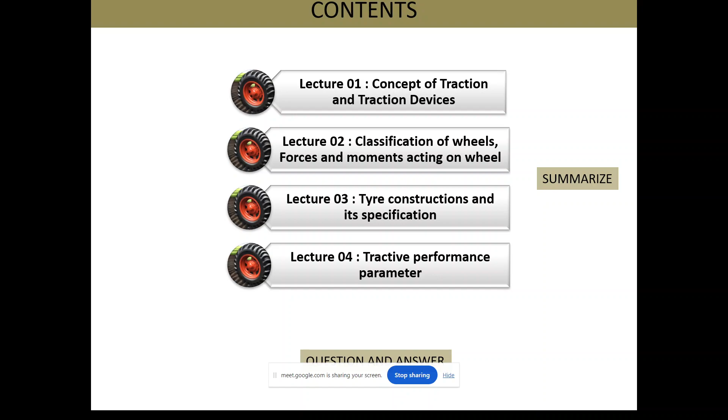So let's start with a basic introduction of this course. Mainly, the main use of a tractor, as you must know, is for pulling implements, sometimes off-road and sometimes on-road for transportation. For pulling, we pull implements like sowing machines, tillage implements, and sometimes for threshing purposes, and so on.

So for pulling those implements we need to generate traction. That is the main purpose of the tractor. And from there we can also get a basic definition of traction, which is nothing but the way a vehicle uses force to move over a surface. That is a basic, layman definition of traction.

As we increase our implement size to increase the field capacity or field efficiency of the machine, with that increased field capacity, we need to have better traction. Suppose we have 45 kilowatt engine power, but we are taking only hardly 23 or 30 kilowatt, then that wasted power needs to be taken into account, and we will discuss why most of the power gets wasted.

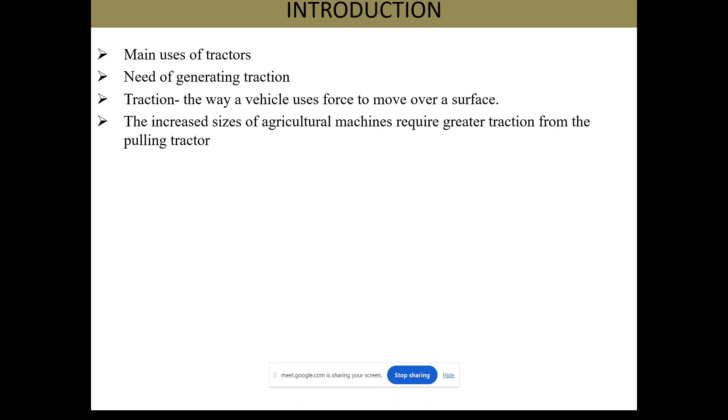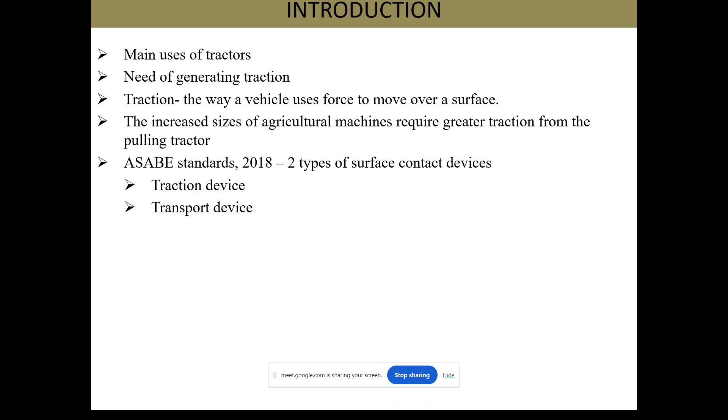This is an ASABE 2015 standard diagram showing how power gets transmitted from the flywheel to the drawbar. If you have any doubt, you can ask anytime, and I will be continuing.

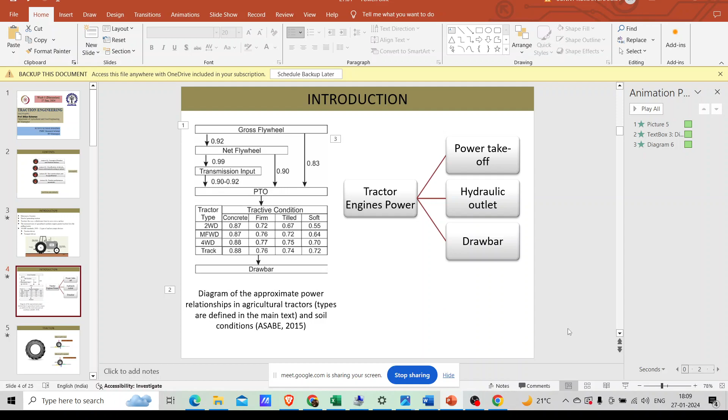Okay, so from gross flywheel to net flywheel, 92% power, 92% efficiency is there. From net flywheel to transmission input and to PTO, all the efficiencies are shown here in this diagram.

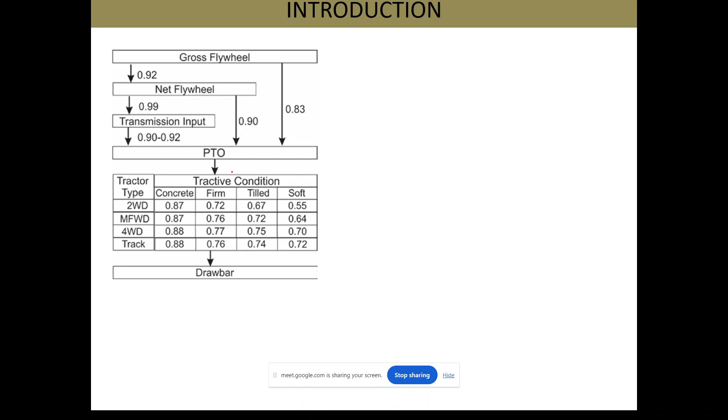The main thing you can see here is that as we move from concrete to soft surface, the efficiency which we get at the drawbar is decreasing.

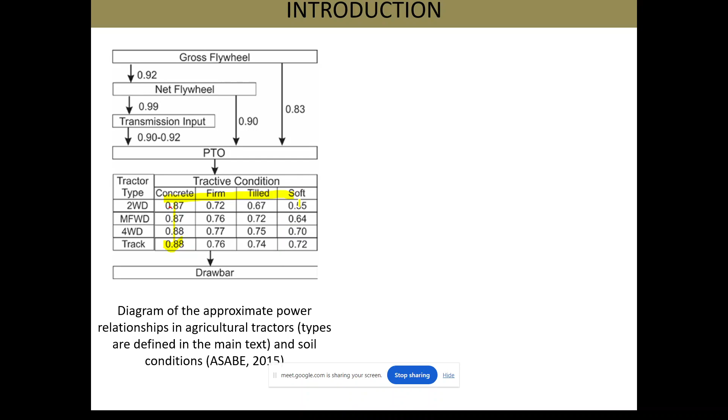As we move from concrete to soft soil, the efficiency is basically decreasing. And as we move from two wheel drive to mechanical front wheel drive to four wheel drive to track, the efficiency is increasing. That is a general observation which you can conclude from this diagram also.

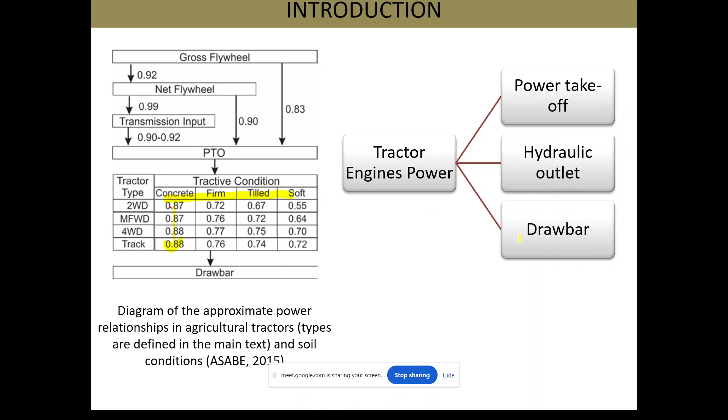From engine power, we basically get three power outlets: first is power takeoff, second is hydraulic outlet, and third is drawbar. One thing to note is that drawbar is the most used power outlet, and it is also the least efficient. In this lecture series, our focus is the power which we take from drawbar only.

So let us start with what traction actually is. I don't have currently that pad, I will be having it next week. So if the diagram gets disturbed, please manage it.

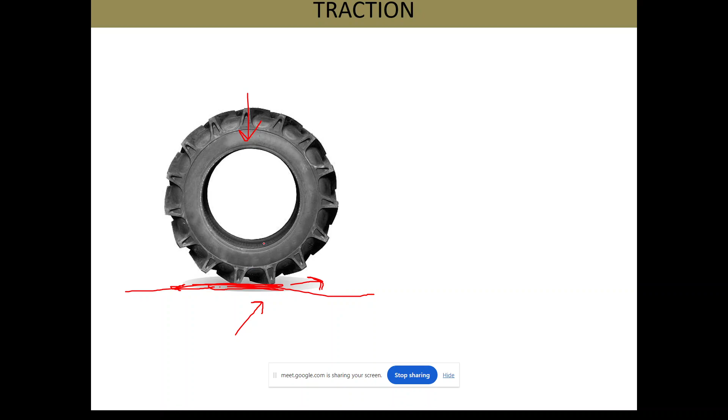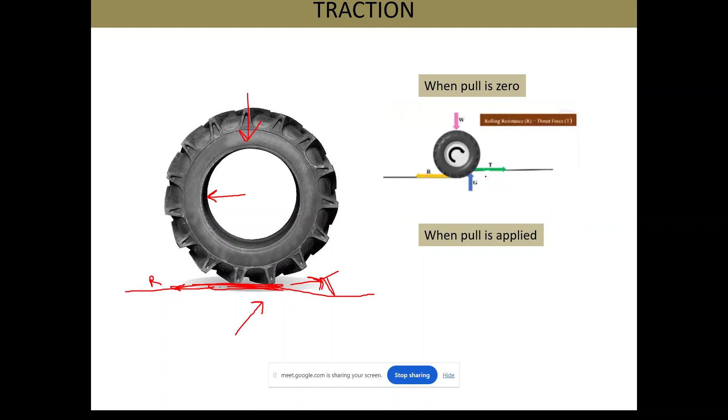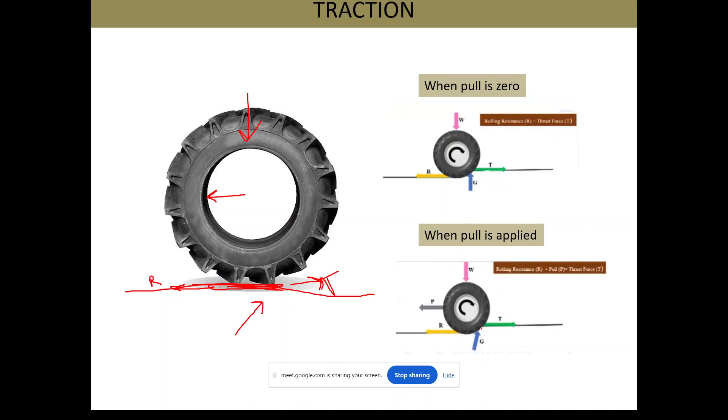This rolling resistance developed, and the thrust which we get from the shearing action, when we subtract rolling resistance from that thrust, we get the pull generated by the tire. When pull is zero, we have no pull, and the thrust is there, rolling resistance is there, and the ground reaction is acting vertically upward. When pull is applied, the ground reaction is shifted, it is tilted, and we have a pull generated here.

The next part is factors affecting traction. First is soil parameter, in which moisture content, bulk density, or type of soil comes. Second is wheel parameter, in which inflation pressure or the weight coming on the tire is considered. Third is operating parameters, in which soil-tire interaction parameters like slip mainly comes.

The total thrust generated by the tire is given by the equation A*C plus W*tan(phi), where A is the contact area of the tire which is in contact with the soil, C is the cohesion, W is the normal load, and phi is the angle of internal friction.

When we have sandy soil, C equals 0, and when we have clay soil, phi equals 0. The importance of this is that when C equals 0, that term is 0, and we get all thrust from W only, as phi is mainly generally constant.

So in sandy soil, we have to increase weight to get more traction. And when phi equals 0, that term becomes 0, and C is generally a constant parameter, so we have to increase the area of the tire to get better traction.

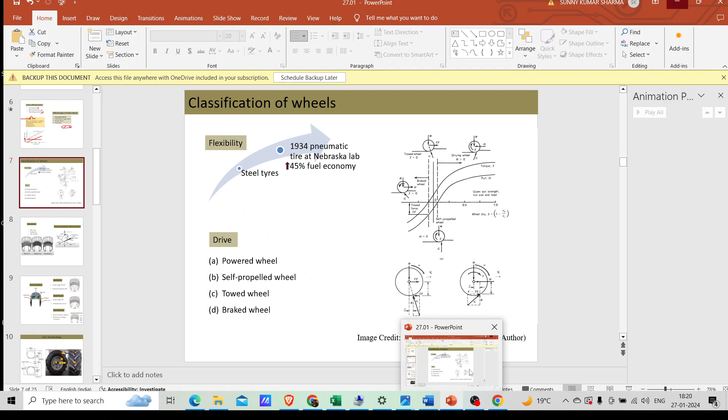Classification of wheel is the next topic. So wheels can be classified...

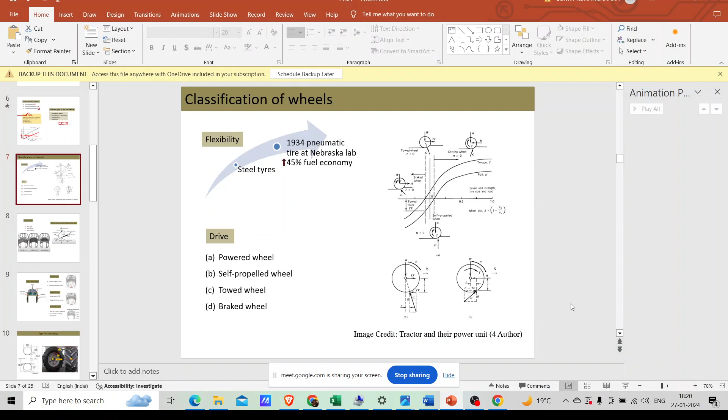So wheels are mainly classified based on flexibility, based on drive condition, and also based on construction. Based on flexibility, wheels can be classified as steel wheel and pneumatic wheel.

Earlier, we were having steel tires only, but steel tires had many limitations. They were very bulky, dumpy, and gave a lot of sound when in working condition. For that, in the 1930s at Nebraska lab, research was done, and when pneumatic tires were invented, the fuel economy increased by 45%, and it just revolutionized the whole agriculture system.

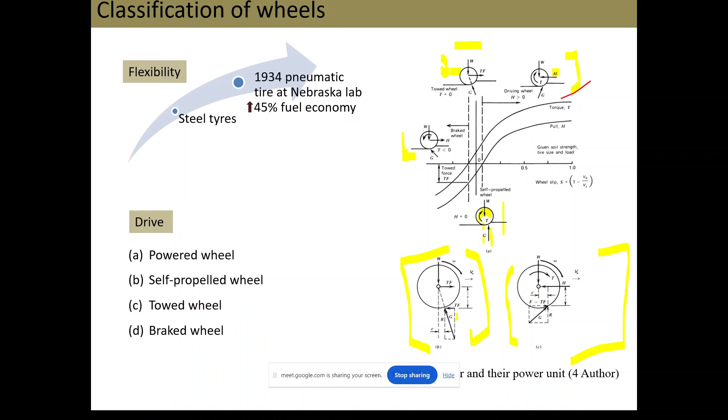In detail, you can take the screenshot of this powered wheel and brake wheel. In diagram B, we have towed wheel, and in diagram C we have powered wheel. This diagram in detail we will cover in the next lecture series.

Is anyone else trying to enter?

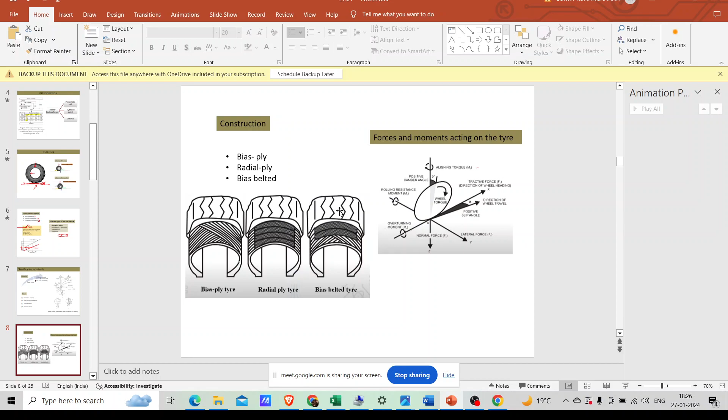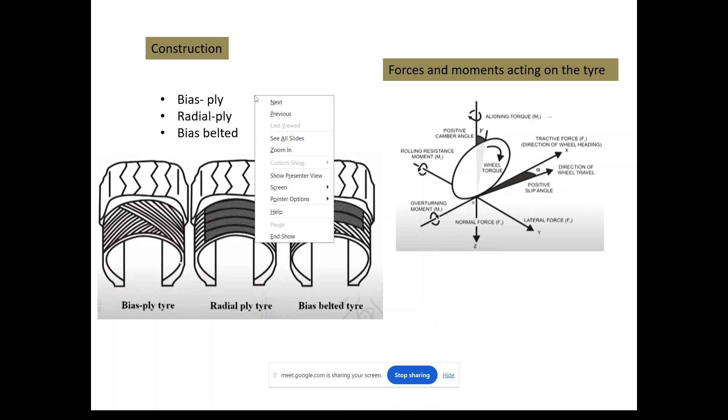Based on construction, tires can be classified as bias ply tire, radial ply tire, and bias belted tire. Bias ply tire is shown here in this diagram. Radial ply and bias belted ply are also shown, and in detail we will cover in the next slide.

Forces and moments acting on the tire are generally three forces and three moments. In the x direction, we have tractive force, and the moment acting in this direction is the overturning moment. In the y direction, we have lateral force, and the moment acting is the rolling resistance moment. In the z direction, we have normal force, and the moment acting is the aligning torque.

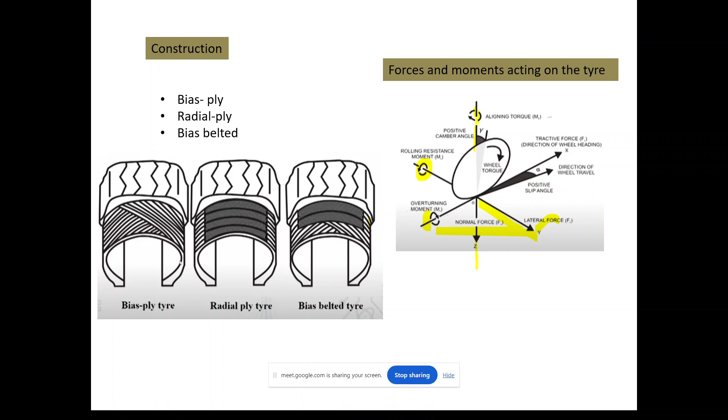Coming to tire construction, generally in a tire we have tread, edge cover, sidewall, inner liner, carcass, and steel belts, as shown in the diagram.

In bias ply tire, we have beads and carcass. Suppose we have the center line of the tire; with the center line, these plies make some angle, called the crown angle. For bias ply tire, this is 54 degrees, and these plies are at 90 degrees in the radial ply tire.

The difference between these is a geometrical difference. Mainly in bias ply tire, sidewalls are relatively stiffer, while in radial ply tire, sidewalls are prone to cut because the radial ply tire gets more deflection. This also gives better traction in field conditions.

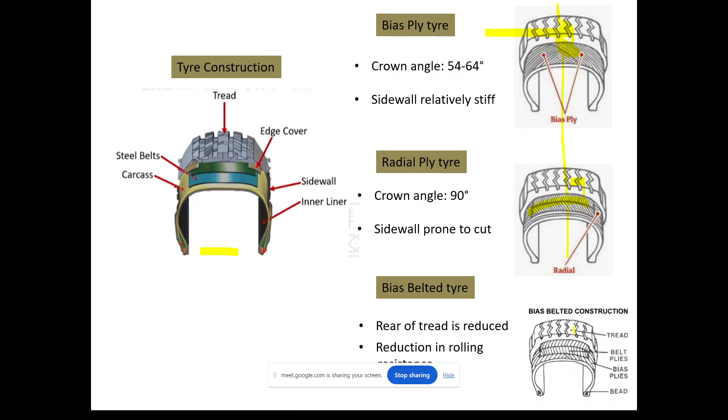Bias belted tires are nothing but a combination of bias tire and belted tire. A belt is just there; when we insert a belt in this bias ply tire, we get a bias belted tire.

Tire terminology consists of the main dimensional parts of the tire. From this real diagram of the tire, you can relate to this schematic diagram, where the section height is shown here, over the nominal rim diameter and rim diameter, and this difference, flange height, is also shown here as h dash.

This is undeflected when unloaded; this is the unloaded condition, and when we have deflection, the section height is called deflected section height. From the center line, when we divide the overall diameter, we get the radius of the tire, and when we subtract that deflection from the radius, we get the static loaded radius.

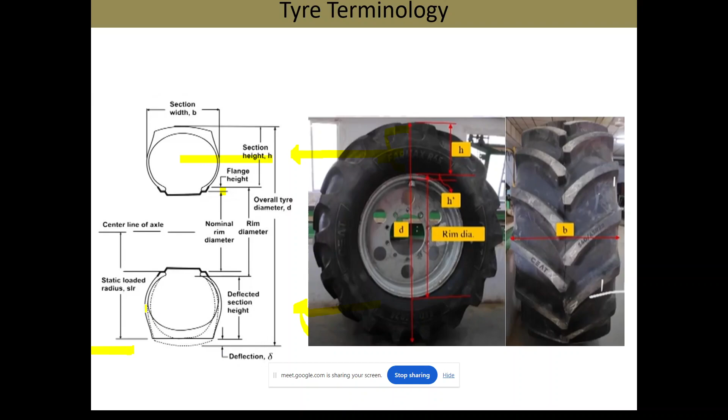This is the tire designation. The tire is mainly designated by its size, aspect ratio, type of construction, ply rating, pattern code, load plate, rim diameter, serial number, manufacturer's name, collaborator's name, and company logo.

This is a car tire, in which the designations are a bit different. The tire for tractor tire I will show in the next slide. For a car, generally we have P for passenger car, 215 is the nominal width, 65 is the aspect ratio, R is radial, and so on.

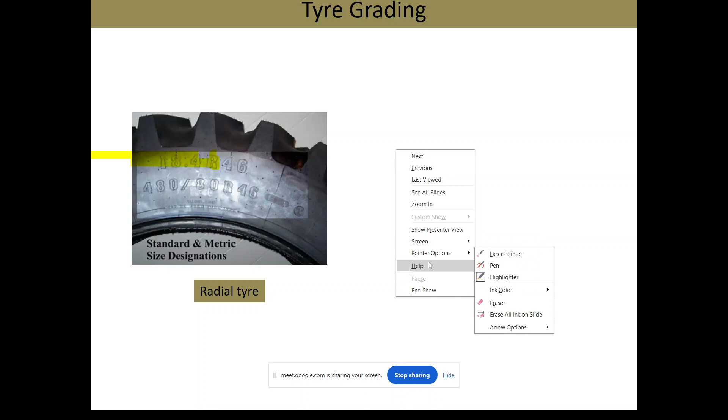Tire grading for radial tire. First is the radial tire, which is designated with an R symbol. When we have this R symbol in the tire, we can easily say that this tire is radial. 18.4 is the section width. Suppose here the tire is designated as 18.4 R46. So first, 18.4.

Hello, Sivaraman. Hello. Hello, Sivaraman, are you there? No, sir. Yes, sir, are you there? Sir, I'm present, sir.

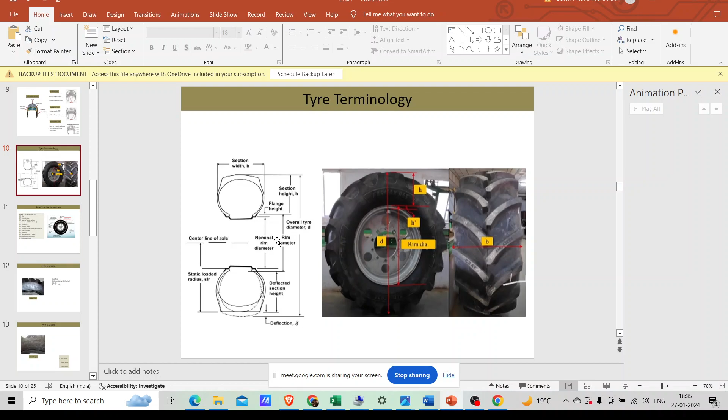From this section width you will get section height from this aspect ratio, and that section height you multiply by 2, as you have two section heights for calculating overall diameter. And this rim diameter you will multiply by 1.06, because you have some flange height there. For compensating this nominal rim diameter and rim diameter, we multiply by 1.06 because nominal rim diameter is designated on the tire, and rim diameter is somewhat bigger. For compensating that we multiply with 1.06, so you can do that, then you will get the radial tire.

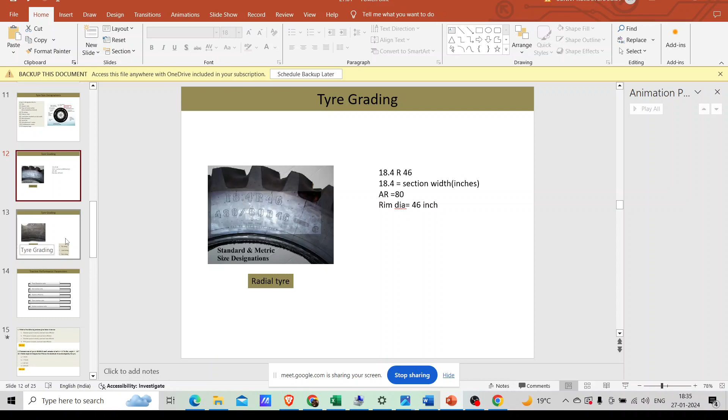That problem is also given in the next question answer session, so if you are calculating then it's okay. And for bias ply tire, only R - if R is not designated on the tire, you can say that this is a bias ply tire.

13.6 is what? Can you tell? Can you say what is 13.6? 13.6 is the section width, sir. Section width, yes. And aspect ratio is not given here, so aspect ratio... we should take 75%.

Aspect ratio as 75. Yes. And 28 is the nominal rim diameter. Yes, 28 will be the nominal rim diameter. And below that we have 12 PR nylon 128 A6.

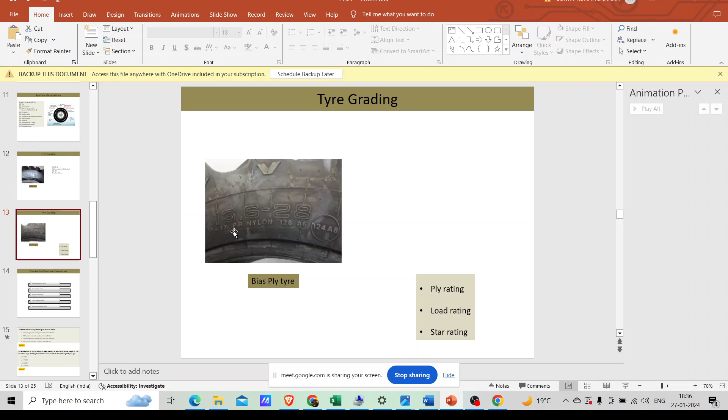12 PR is for ply rating. Ply rating and load rating are nothing but designations of the strength of the tire, mainly the load carrying capacity. And the star rating is how much inflation pressure the tire can bear.

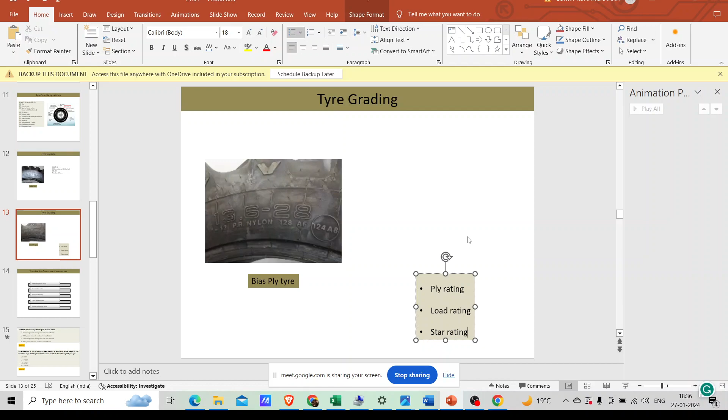With every increase in the star rating, suppose we have 1 star and we increase the star by 1, we are saying that the inflation pressure it can bear is 6 psi more. Meaning 1 star is equal to 6 psi.

Tractive performance parameters are the gist of this whole traction series. So do you have any idea what is travel reduction ratio? Travel reduction ratio is also known as coefficient of slipping, sir. Travel reduction ratio is nothing but slip only. Yes sir. What is slip? Can you say?

Without load, a tire can travel and cover a specific distance, but with load, the tire cannot be able to cover that distance which it previously covered without load, sir.

So the difference between these two is referred to as travel reduction ratio. You said about loaded and unloaded condition, right? Yes, sir. I think you said this slip definition in terms of loading and unloading, right? Yes, sir, okay.

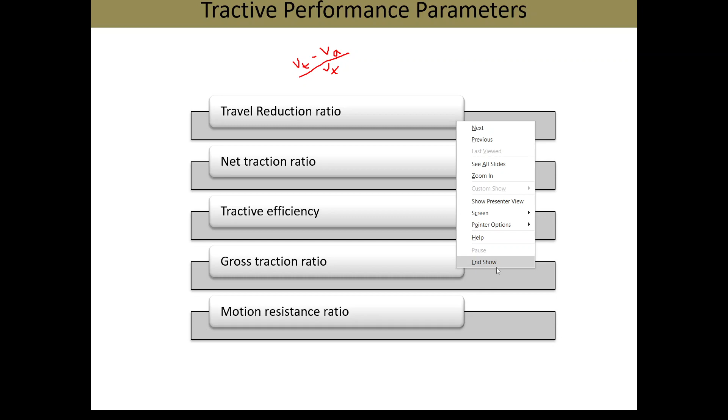Is anyone trying to enter? Hello, Sundargiri.

Sundargiri, can you tell what is net traction ratio? Actually, I don't remember.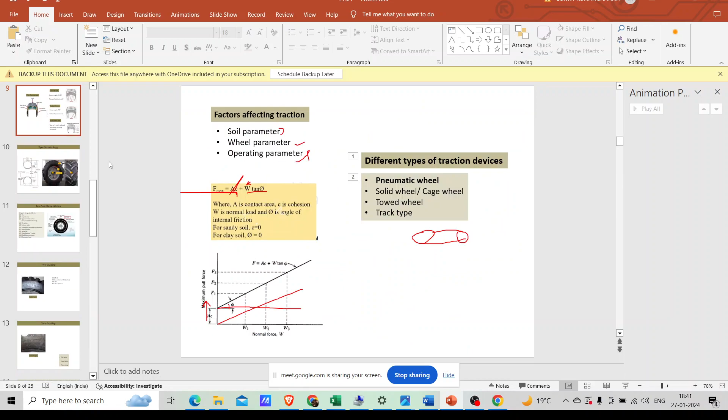Net traction ratio is actually the pull, the total pull, which we discussed earlier in this slide. I was telling that this is the thrust which the tire generates, and this is the rolling resistance. This thrust minus the rolling resistance, when pull is applied, we get some pull, which is nothing but thrust minus rolling resistance. This pull is divided by the dynamic weight coming on a wheel, and that is the net traction ratio. This pull by W is net traction ratio.

This rolling resistance by W is the motion resistance ratio. This thrust, the total thrust developed by the tire, divided by the dynamic weight coming on it, is the gross traction ratio. This pull by W is net traction, this T by W is gross traction ratio, and this rolling resistance by W is motion resistance ratio. Can you repeat what I said?

Sundargiri? Yes, sir. So P by W is what? Sir, your dynamic load with the rolling resistance divided by rolling resistance is the net traction ratio. No, no, no. Rolling resistance divided by dynamic weight is motion resistance ratio, not net traction ratio.

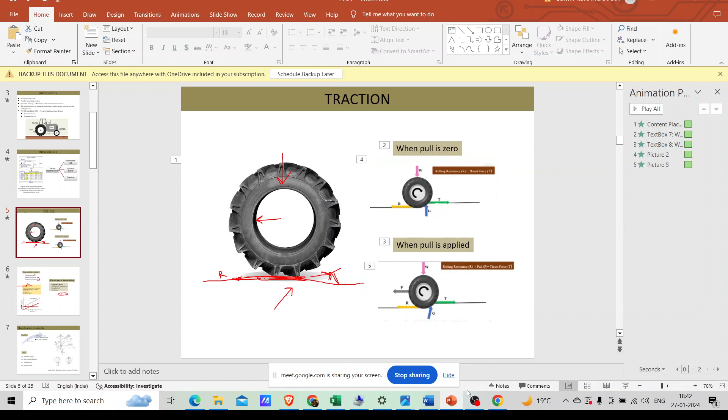Net traction ratio is pull by W. Net pull divided by dynamic weight is net traction ratio. Rolling resistance divided by weight is motion resistance ratio. And thrust divided by weight is the gross traction ratio, the total thrust generated by the tire. Okay, is it clear? Yes, sir.

So travel reduction ratio, or slip, is the reduced velocity due to loading condition, due to the shearing action between the tire and soil. Its expression is 1 minus V actual by V theoretical, or V theoretical minus V actual by V theoretical. Net traction ratio I have defined. Tractive efficiency is nothing but the drawbar power by the axle power, the power which the axle gets from the engine.

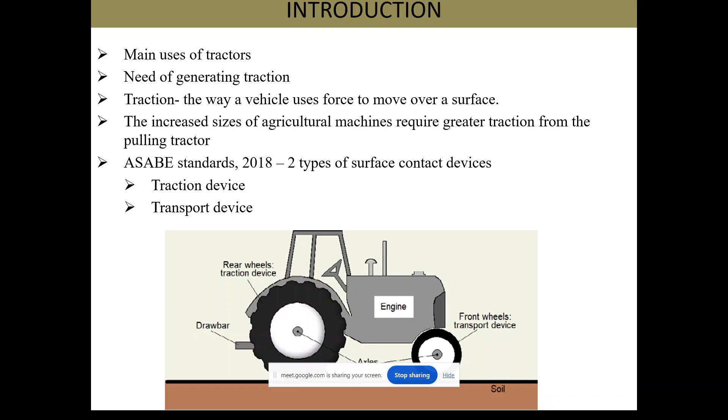Suppose this gray part is the axle. This axle is getting some power from the engine, and this tire is developing some traction, some drawbar power. This drawbar power divided by the axle power which the tire is getting on its axle is the tractive efficiency. So the tractive performance of any tire can be set on the basis of five parameters: the slip between the tire and the soil, the net traction ratio, gross traction ratio, the motion resistance ratio, and the tractive efficiency, which is nothing but the drawbar power by axle power.

Sundargiri, tell me what are those five parameters on which we can define the tractive performance parameters.

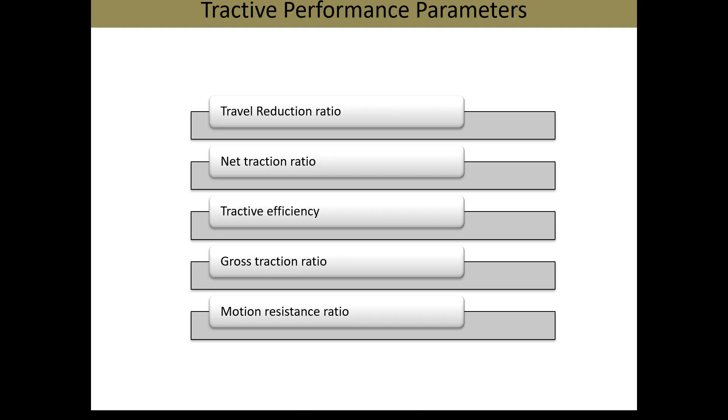It is 7.3 kilonewton, sir. Yes, correct. The third question is, which of the following combinations will give maximum deflection of the tire?

Which of the following combinations will give maximum deflection to the tire? If normal load is maximum and inflation pressure is maximum, if normal load is minimum and inflation pressure is maximum, if normal load is maximum and inflation pressure is minimum, if normal load is minimum and inflation pressure is minimum. What do you think?

What is the answer? Normal load is maximum and inflation pressure is minimum, sir. I think so, sir. Correct, correct. Normal load is maximum, it will obviously give more deflection. And inflation pressure is minimum, giving more deflection.

Yes, sir. So the fourth question is, which we were doing that time also. What overall diameter did you get for the 13.6 28 tire? Aspect ratio you take as 0.75. 13.6 is the section width in inches, 28 is the nominal diameter in inches.

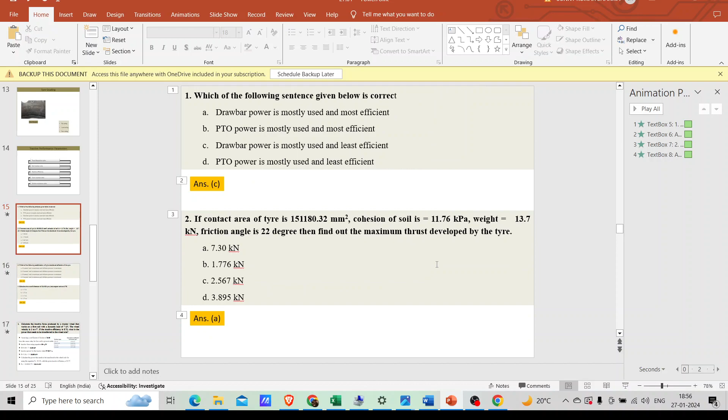It is clear now? Yes, sir. Actually, I don't have a pad right now, and I don't have a scribble pad also. I'm not able to get it.

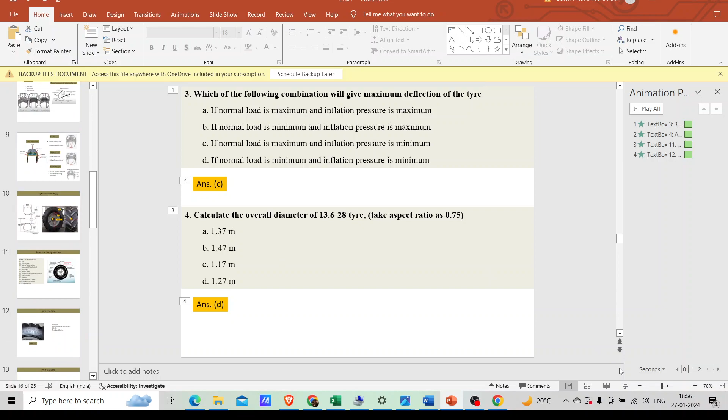So the next five more questions will clear all your concepts of this course, of the first week. So I'm giving you those questions. The first subjective question is: you have to calculate the tractive force produced by the tractor wheel.

Calculate the tractive force produced by a tractor wheel that works on a firm soil with a dynamic load of 7 kN. Then the wheel velocity is 3 meter per second. If tractive efficiency is 0.75, what is the power that needs to be transferred to the wheel axle?

So there are basically two questions here. You have to first calculate the tractive force which the wheel needs to generate for a 7 kilonewton load - the dynamic load coming on tractor is 7 kilonewton. You have to find the tractive force. Then, if it has velocity of 3 meter per second and tractive efficiency 0.75, what power needs to be given to the wheel axle - that you have to calculate. So first calculate the tractive force produced by the tractor.

Weight coming on it is 7 kilonewton. So first, what will you do? Just tell me the steps. W, dynamic load is W, W is coming on it.

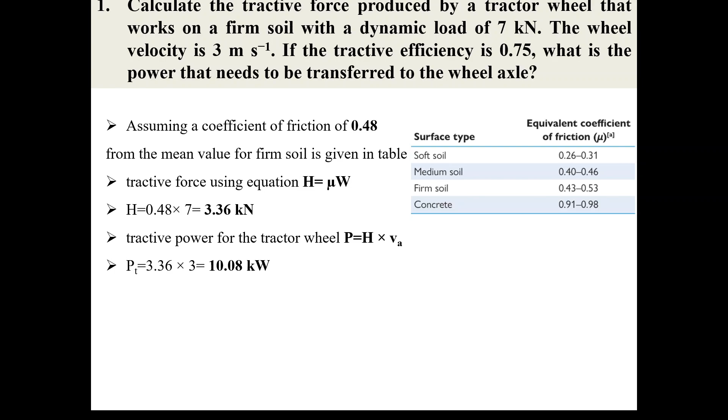Then what is the power that needs to be transferred to the wheel axle? What will you do now? What is tractive efficiency? I've described it in earlier slides. Tractive efficiency is the drawbar power which we have calculated, divided by axle power, which the question is asking - the power needs to be transferred to the wheel axle. Tractive efficiency is drawbar power by the power needed to be transferred to the wheel axle, which is 0.75. When you do that, you will get the power needs to be transferred to the axle.

Okay sir, did you get this problem? Yes sir. So for 13.44 kilowatt at axle, we will design the transmission system accordingly. In transmission, we have some efficiencies, some losses. This 13.44 kilowatt must be transferred to the wheel axle.

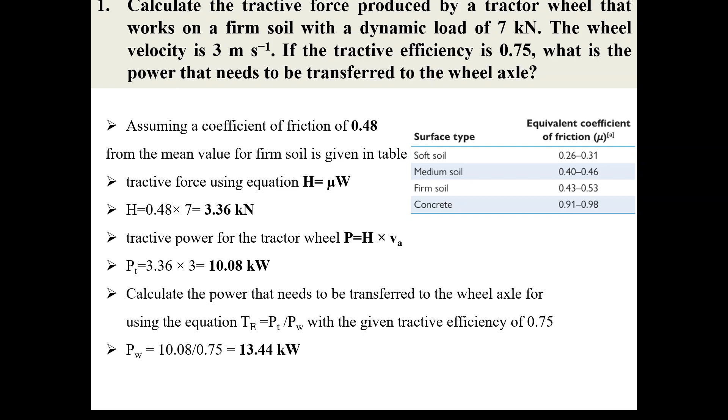Second question is, a wheel on a tractor receives 45 kilowatt from the tractor powertrain. The wheel rotates at 30 rpm. If the rolling radius of the wheel is 0.75 meter and the speed of the tractor is 2 meter per second, calculate the torque acting on the wheel and travel reduction ratio. Travel reduction ratio is also known as slip, commonly known as slip.

What is the formula of power coming on the axle? Do you know the formula of power? This 45 kilowatt is coming on the...

Sir, the wheel is getting 45 kilowatt. This is the power coming on the wheel from the powertrain. So the formula of power is 2 pi n t. 2 pi n is nothing but related to power, formula of power is torque into omega. Omega is nothing but 2 pi n. N is given here as 30 rpm. So you can get omega, the angular velocity.

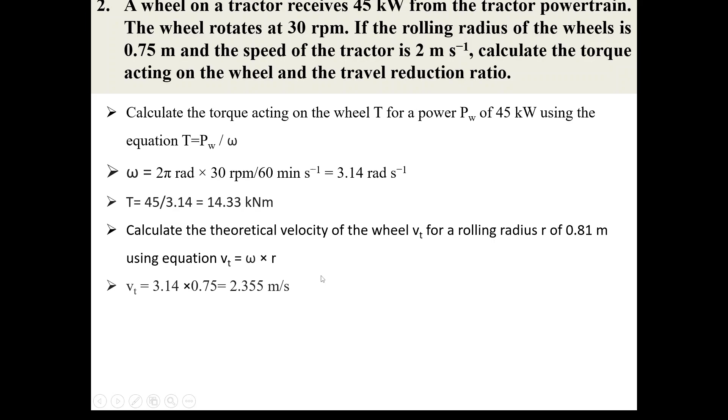Yes, sir, theoretical velocity you got as 2 pi r omega, or 2 pi n into r. 2 pi n is omega, which we have already calculated, into rolling radius 0.75. Omega into r is the theoretical velocity. 3.14 into 0.75 gives the theoretical velocity. And the actual velocity is given as 2 meter per second. So 2.355 is theoretical velocity and actual velocity is 2 meter per second.

With this slip equation of theoretical velocity minus actual velocity by theoretical velocity, you can calculate the slip. 2.355 minus 2, by 2.355. What ratio do you get? Slip comes out to 15.5%. Are you doing it?

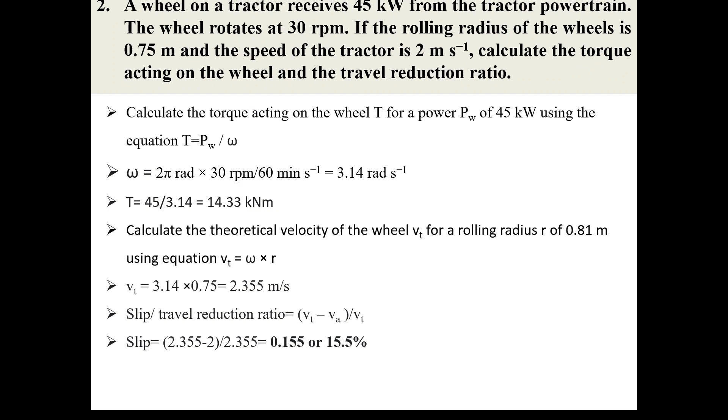Okay, come to next question. Find the distance covered by a tire whose designation is 500 by 65 R22.5. If it makes 12 revolutions in 2 minutes on a hard horizontal surface with a tire deflection of 25%. If wheel slip is 15%, then find the actual distance covered.

So first you have to calculate the overall radius of the tire. For bias ply tire, we have done this earlier. For radial ply, 500 is what? Section width in mm, 65 is the aspect ratio, and...

22.5 is the nominal rim diameter in inches. You do every calculation in centimeter and tell me what is the overall diameter of the tire. 500 is section width in mm. Calculate the overall radius of this tire.

Can you calculate it? Doing, sir, trying to do. What are you doing, tell me.

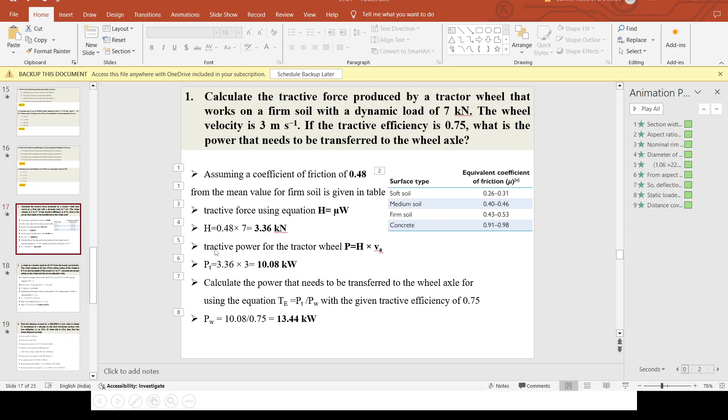So the diameter of the wheel without deflection is what? 1.065, or 1.06 into 22.5, into 2.54. Are you doing this? Doing, sir, yes sir.

Can you cross check that this diameter which I have calculated is correct? 1.06 into 22.5 into 2.54, then 0.65 into 500 in mm, that is 50 centimeter into 2. Is it coming to 125.58 centimeter? Doing, sir.

From the aspect ratio, height we got 0.65 into 50. Yes sir, it is coming. Diameter of the wheel without deflection, correct 125.58, this expression? Sir, it is correct, sir. 125 point, yes sir, correct only sir.

And section height, this part, this is section height. Deflection is del by h. So from here you can calculate deflection. We have h here, we have calculated, this 32.5. Yes sir, this 32.5, you multiply it with 0.25, you will get the deflection.

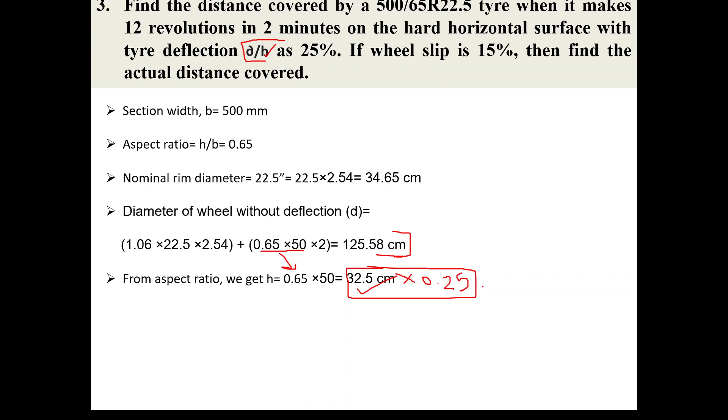This is the deflection that I am getting. And this is the overall diameter. When what deflection you are getting? Is 8.1. 8.1, okay, and this is the overall diameter.

So what is the overall radius? When you divide it by 2, you will get overall radius. What is the radius coming? 62, 62.79. 62.79. 79, sir. 62.7.

So you have got overall radius, and you have got some deflection. Suppose this was the deflection. So when you subtract the overall radius with this deflection, means this minus this, you will get the static loaded radius. The static loaded radius is the overall radius minus some deflection.

So deflection you got 8.125, and static loaded radius is overall radius minus deflection. Yes, it is 54.6. 54.668. This is the static loaded radius.

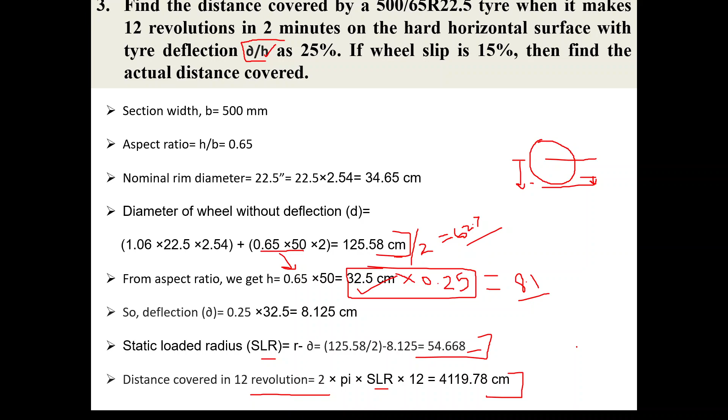We have 15% slip also. For slip, what sir, we will do? Slip is distance by revolution without load and distance by revolution with load. Then distance by revolution without load, so distance by revolution without load we have.

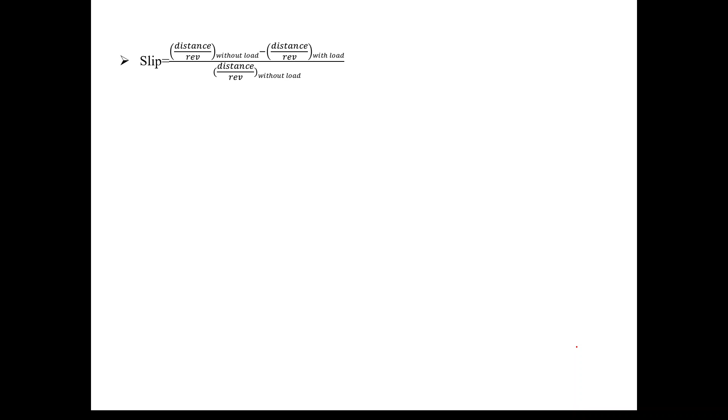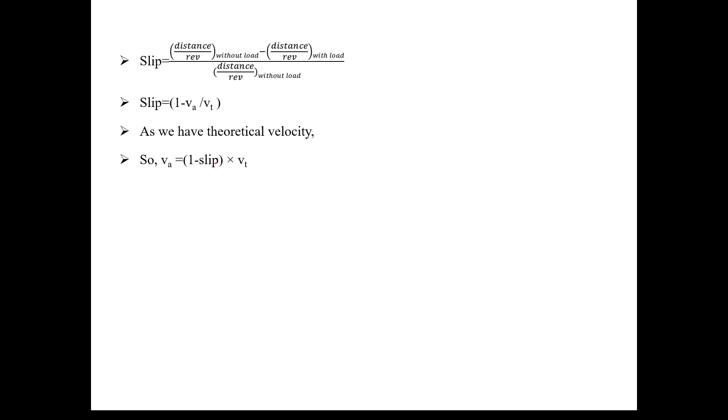Our slip is 1 minus v actual by v theoretical, we also know. So we have theoretical velocity we have calculated earlier. So we have to calculate actual distance. In formula we have actual velocity as 1 minus slip into theoretical velocity.

So this velocity is what? Distance covered by revolution, this is nothing but velocity. Distance by revolution is velocity. And we have to calculate distance, so we will multiply the velocity into revolution.

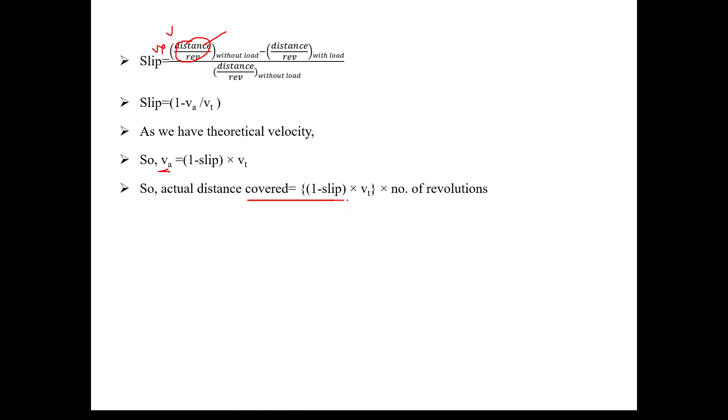This is the actual velocity. We multiply it with number of revolution, we will get the distance covered. Did you get what I said?

Yes sir, yes sir, this is actual velocity. Same thing here, this is actual, theoretical velocity, and actual velocity is nothing but distance covered by revolution. So actual velocity into revolution is the actual distance covered. So 1 minus slip, we have 25% slip, 0.25.

1 minus slip we have, and theoretical velocity is the distance covered by revolution. Distance covered without load, at static loaded radius, that is what we calculated earlier. This is the distance covered without slip, divided by 12 is the theoretical velocity, and this whole term is the actual velocity. When we multiply it with number of revolution, we will get the actual distance covered. So what you got, the actual distance covered?

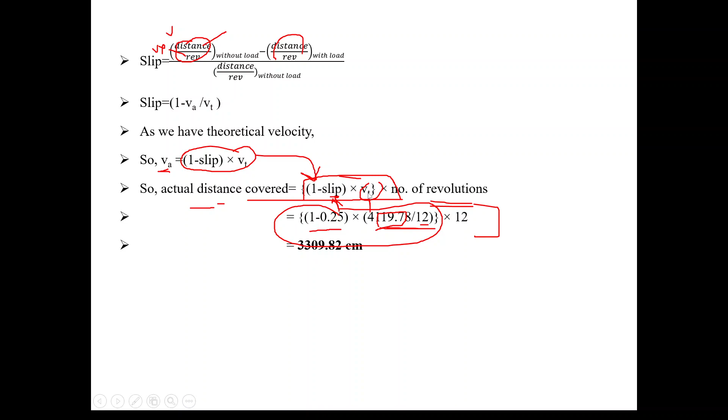I think only you are solving. Currently working it out, sir. Yes Sivaram, yes, currently working it out, sir.

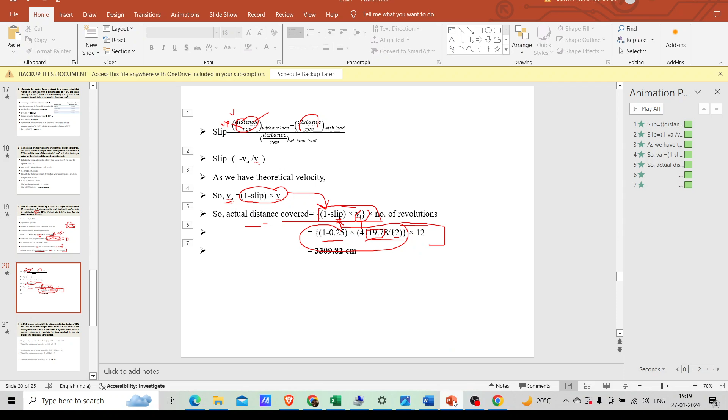Okay, we are moving to the next question. These questions are covering all the concepts which we have studied till now. This question is very easy if you have understood the basic concepts of towing and powered wheel.

A two-wheel drive tractor is weighing 2500 kg with a weight distribution of 30% and 70% on front and rear axle. Means of 2500 kg, 30% is going on front axle and 70% is coming on rear axle. If rolling resistance of each of the wheel is 4%, means 4% is the rolling resistance of every wheel, you have to calculate the force required to tow the tractor. Means just move the tractor, what is the force required, you have to calculate.

Have you understood the question? What you need to do? How will you proceed with this question?

2500 kg, you have to distribute it 30% and 70% on front and rear axle. So first do 30% of 2500. That amount is coming on the front axle. When you divide it by 2, you get the weight coming on each of the front wheels. Then you multiply it with 4%, and you get the force required for the rolling resistance of that wheel. That is only the force required to tow the vehicle, which we discussed earlier, the towing force.

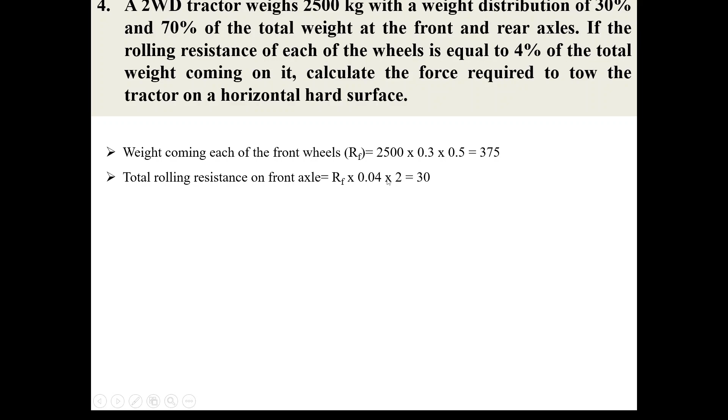So rolling resistance of the front axle will be what? 4% of this value, then multiply by 2, since we divided it by 2 earlier, here I'm multiplying it by 2. This is the total rolling resistance of the front axle. Similarly, we have the total rolling resistance of the rear axle.

This is nothing but the force required to tow - this 30 kg and this 70 kg. When you add them, you get 100 kg as the force required to move that vehicle. This 2500 kg vehicle, if you apply a weight of 100 kg, the tractor will start moving. This is the basic concept of towing. Did you get this?

Yes, sir. Yes, sir. Okay.

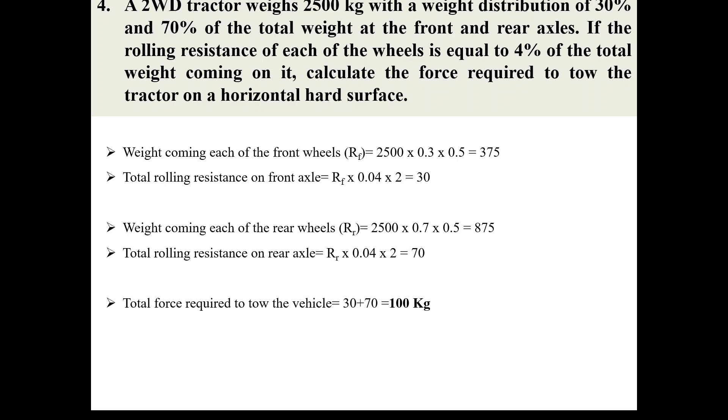The next question is, if this same tractor, whose weight is 2500 kg, is used to pull an implement of 3 bottom MB plough weighing 250 kg, the weight transfer is 2% from the front axle when an implement is attached to a tractor - some weight transfer comes from the front axle and from the implement also. So from the front axle it gets 2% of the weight transfer, and from the implement it gets 10% of the weight transfer.

You have to calculate the coefficient of rolling resistance - the concept we discussed in earlier slides. Calculate the coefficient of rolling resistance of each rear wheel if the weight distribution is equal among the two wheels. So how will you proceed with this question?

You make a tractor. This is the ground reaction on the front wheel. This is the ground reaction of the rear wheel. Weight is getting transferred from the front wheel, and some weight it is getting from the implement. Suppose this is the implement - it is transferring a weight of 10%, and from the front axle there is a weight transfer of 2%.

So what is the dynamic weight? It has its own weight - the tractor is weighing 2500 kg. It has its own weight. 2% of its weight is coming from the front axle, and 10% is coming from the implement. So what is the dynamic weight coming on the rear axle? Can you calculate? You have to add its own weight with the 2% from the front axle and 10% from the implement. Can you add?

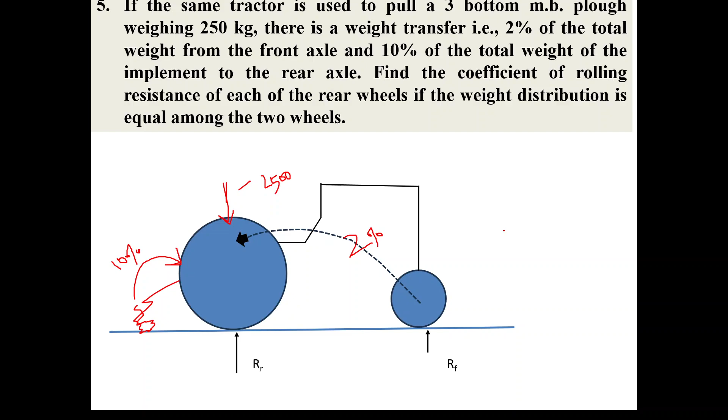2500 kg, 30% was the weight on the front axle, and of that 30%, 2% is coming on the rear axle. So weight transfer from the front axle is 2500 into 30% into 2%, which is 17.5 kg. Weight transfer from the implement is 10% of 250, that is 25 kg.

So what is the total weight? Total weight at that moment means weight transfer from the front, from the implement, and its own weight also. Its own weight is 2500 kg and 70% of that 2500 kg. You add this with the front weight transfer and implement weight transfer. When you add these three values, you get 1792.5 kg. This is the dynamic weight.

Now you have to calculate the coefficient of rolling resistance. For that, you need to calculate the rolling resistance first. Rolling resistance is nothing but what?

4%, I think it is given. Rolling resistance was given 4% in earlier question. So this is the total weight, and 4% of its this value is the rolling resistance of that wheel.

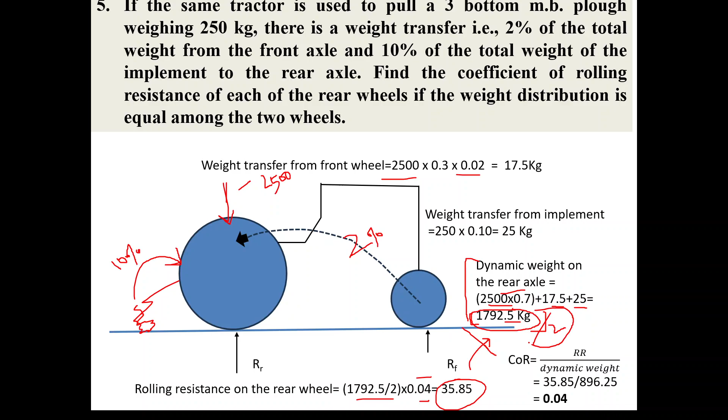Divide and tell me what you are getting. What you got? 35.85 by 1792.5 kg by 2, what you got? It is coming 4%. Coefficient of rolling resistance is 4%.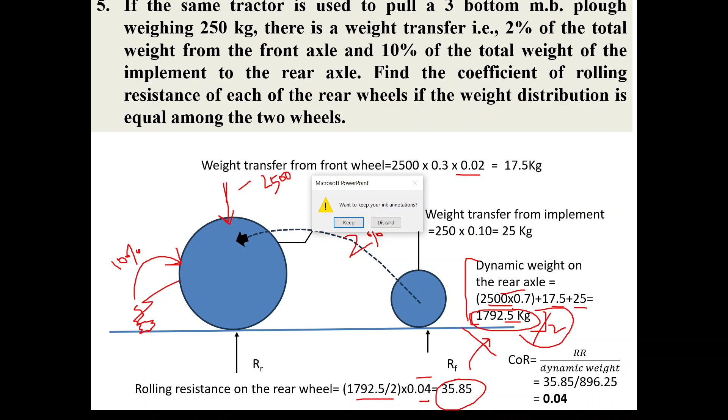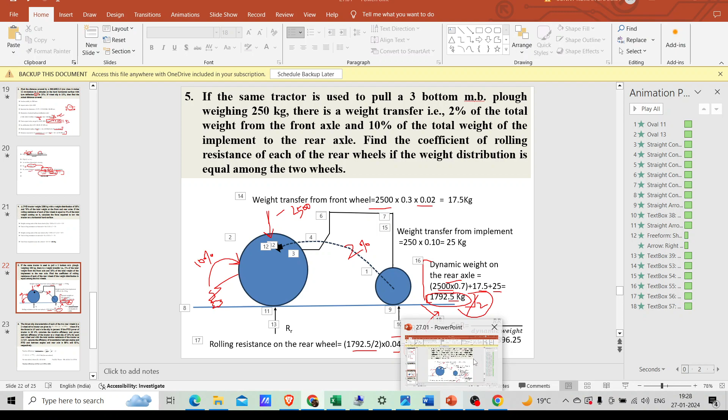Sivaraman and Sundarkiri. Sir. So we have discussed 9 questions till now. We will discuss the last question and then we will end our session now. You do this last question. This question is bit lengthy, but it has all the concepts which we have discussed till now.

The thrust-slip characteristics of each of the two rear wheels in a two-wheel drive tractor are given by this equation, the equation for thrust developed by one of the rear wheels. The concept of thrust developed by a wheel we have discussed in the first 3-4 slides. So the thrust the wheel is generating is given by this equation: 34 into 1 minus e to the power minus 0.06 s, where S is the slip. So F is thrust developed by the rear wheel in kilonewton, S is the slip in percentage.

If the PTO power of the tractor is 30 kilowatt, calculate the tractive efficiency and power delivery efficiency. Tractive efficiency is the drawbar power by axle power. You have to calculate the tractive efficiency, so for that you will have to calculate the drawbar power, and axle power is given. I think power delivery efficiency of the tractor at the wheel slip of 15%.

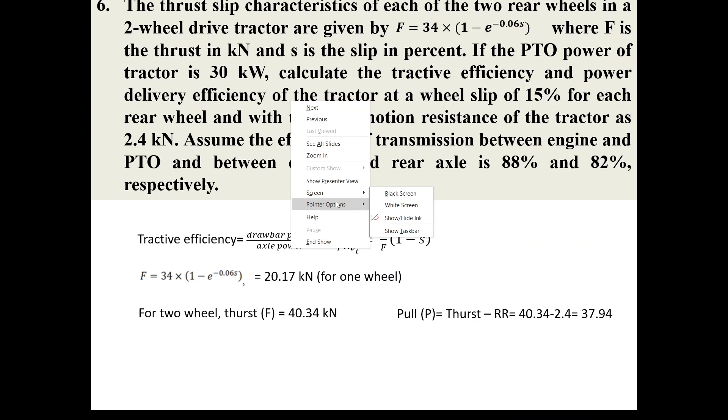Power delivery efficiency. And tractive efficiency is what? You know it is written here also, drawbar power by axle power. But when we need to calculate the power delivery efficiency, this drawbar power will be divided by, not axle power, but the engine power. So this drawbar power by engine power is the power delivery efficiency. You can write it also as drawbar power by axle power into axle power by engine power.

Did you get what I said? Drawer power by axle power, we have that, that is our tractive efficiency. Drawer power by axle power. But we need to calculate drawbar power by engine power, so we will multiply it with axle power by engine power. Did you get it?

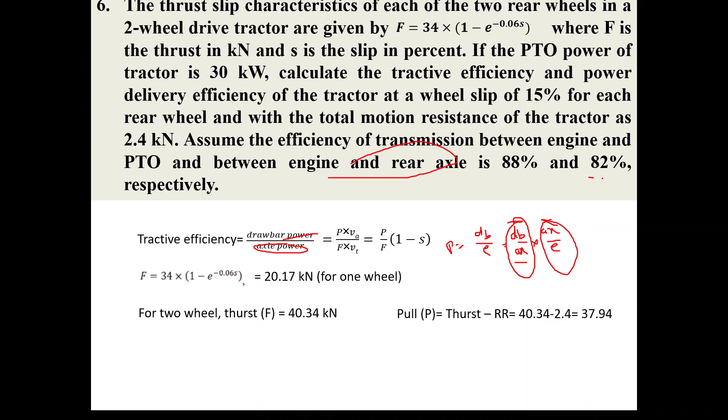This is our tractive efficiency, which you calculated at 80%, and this is axle power by engine power, which is given in the question. From engine to rear axle, this is given in the question as 82%. You just need to multiply these two expressions. This tractive efficiency is 80%, this 82% is given in the question, or in the question it is given that engine to PTO.

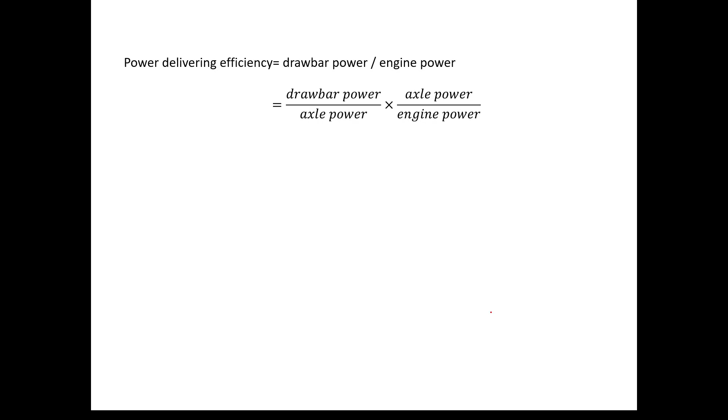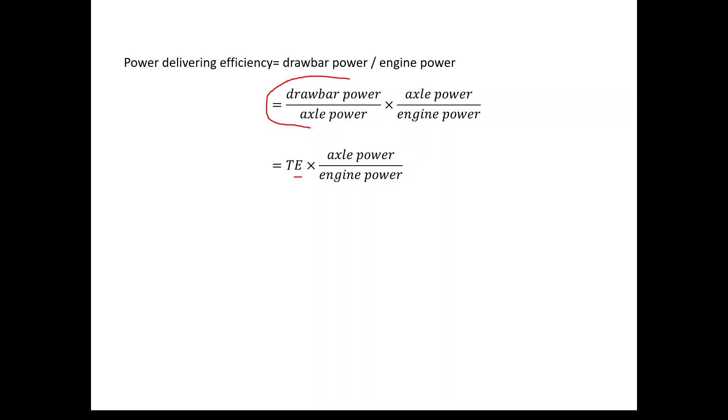So it is given, why I'll tell you. To have a better understanding: power delivery efficiency is drawbar power by engine power. But you have only tractive efficiency, which is drawbar power by axle power. To convert that equation to drawbar power by engine power, you multiply it with axle power by engine power. This is tractive efficiency which you calculated at 80%, and this is the above expression. This axle power by engine power is nothing but PTO power by transmission efficiency, which is also given in the question, this 82% and this 88% efficiency.

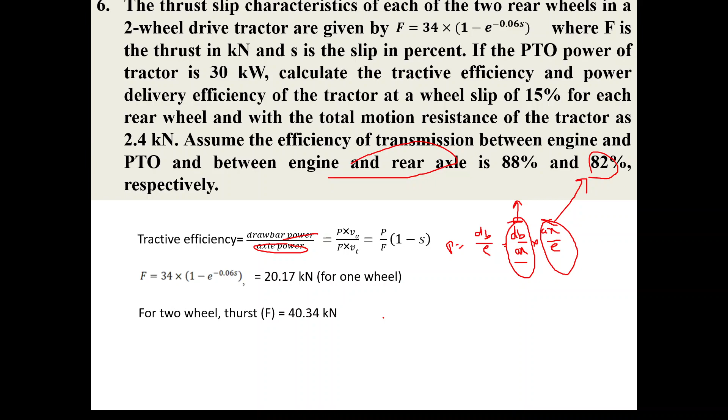But you just simply multiply this 80% with 82% and you will get the answer. As PTO power is not given, I think... yes, if the PTO power is 30 kilowatt, you can also do it that way: 30 kilowatt into 88% into axle power, which is also given in the question, then multiply with 80%, you will get the answer. Or you just simply do 80% into 82%, you will get 65.6% as the power delivery efficiency.

Did you get this question? Yes sir. Yes sir.

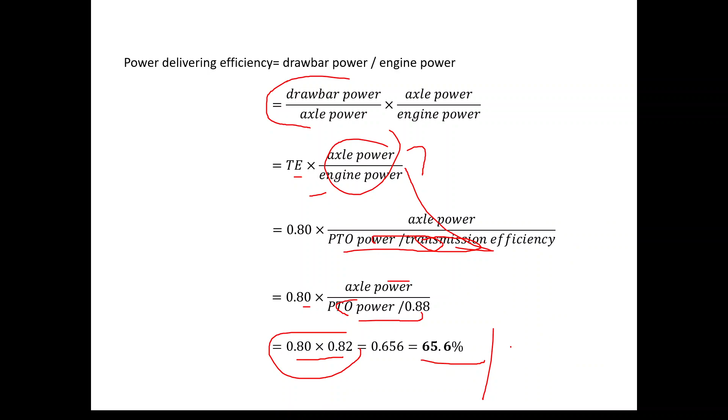This was basically summarizing the whole week one series of this NPTEL course. Have you watched this lecture series of NPTEL? Yes sir, I watched the first 4 lectures. Tutorial lecture I didn't watch completely yet, sir. The tutorial lecture has five or four extra questions, and I have solved all those tutorial questions, so even if you don't watch that, you will get it, I have solved these questions here.